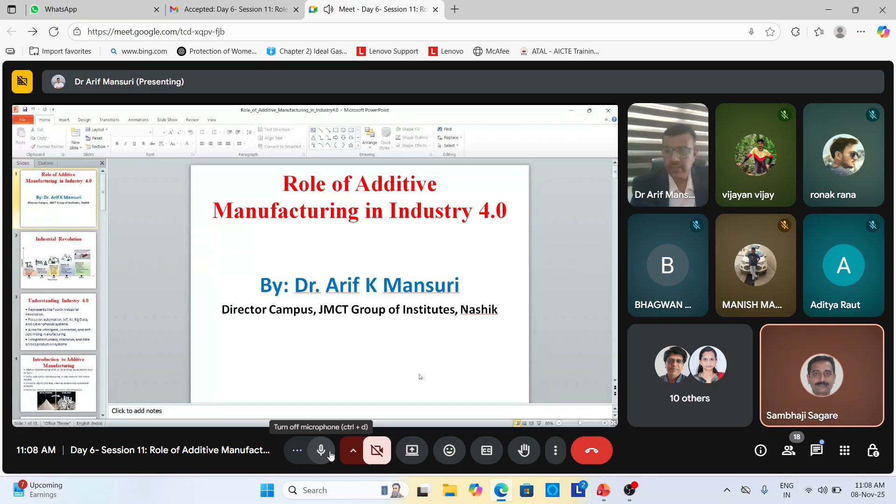Give me a second. Is it visible? Yes, sir. Yes. Thank you. It's visible, sir. I think now it is on the screen.

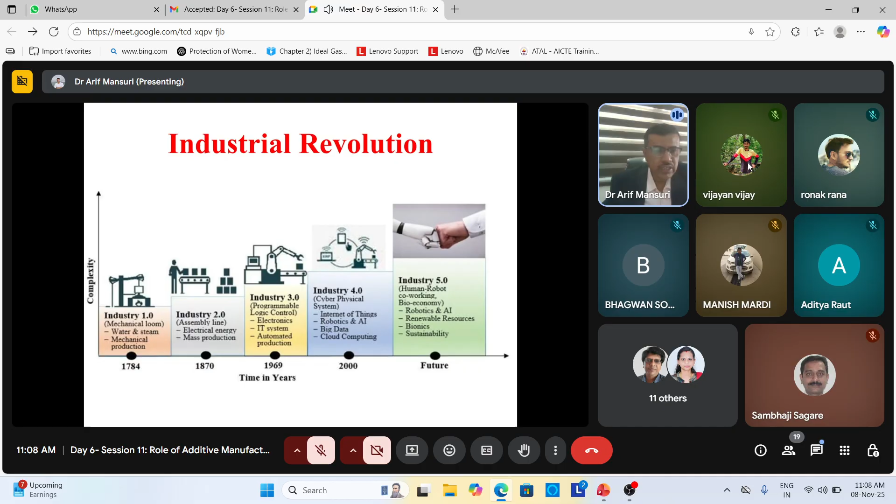Okay. So we will start with the industrial revolution. All the dignitaries present here are from industry or from academia. We all know the industrial revolution was there, and it starts from 1784. These are the four revolutions, actually five revolutions. We are on the verge of transformation from 4.0 to 5.0. Actually, before going into the future, we should know the past. So we'll brief shortly what happened in the past.

In the past period, the major technological and socio-economic change started in Great Britain actually. When the industry was not in picture, labors were there and everything was made by labor by hand, and slowly it comes to the machines. When it comes to machines, it was the first revolution, that is the industrial revolution called 1.0. Mechanical machines were introduced due to the invention of iron and everything. So from hand labor, it shifted to the machine, and individual machines were used where we can make the product, and for day-to-day use, for weapons or defense, everything was made in machine.

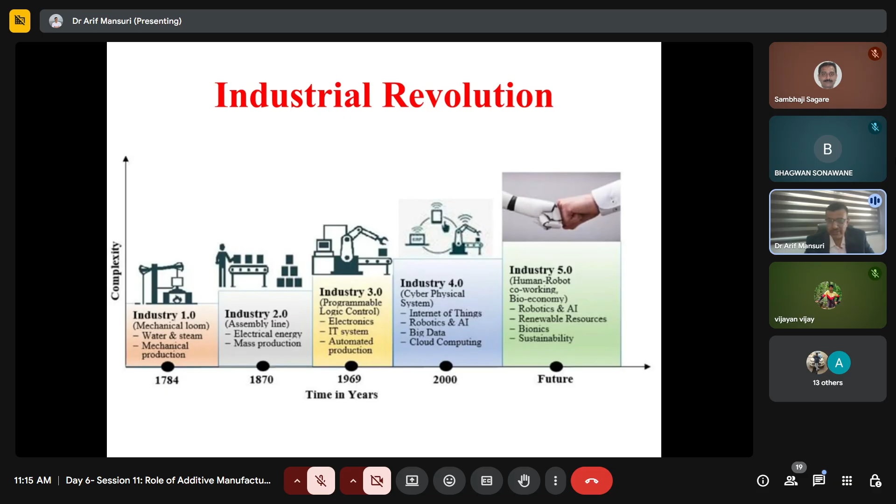So we are on the verge of Industry 5.0, where humanoid robots will be used, where from the raw material to the finished good, there will be no hand touch. The robots will load everything. The robots will be used for all the machining operations, and artificial intelligence will be there. Renewable resources will be there. Bionics will be there, and sustainability will play a great role in Industry 5.0.

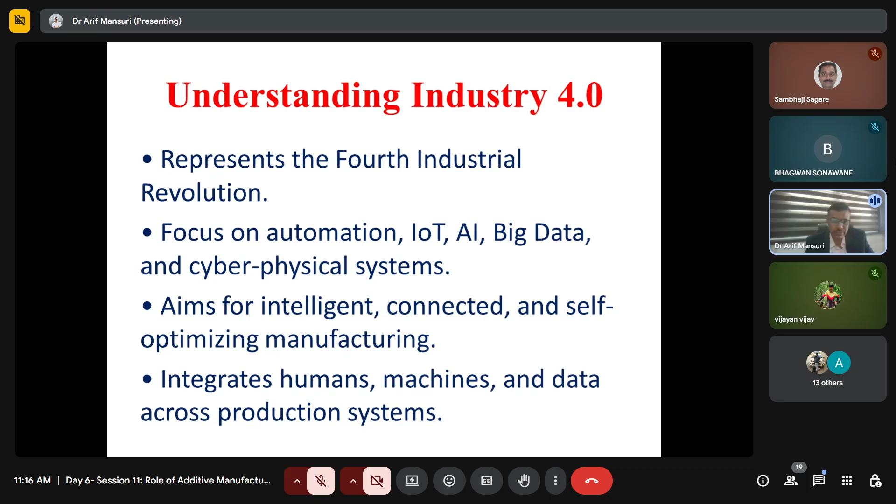So we have already talked about Industry 4.0. What is it? We are living in 4.0 actually. It represents the fourth industrial revolution, with a focus on automation, IoT, meaning Internet of Things, AI, artificial intelligence, big data, and cyber-physical systems. Industry 4.0 aims for intelligent, connected, and self-optimizing manufacturing. It also integrates humans, machines, and data across the production systems.

Now, before moving to the role of additive manufacturing in Industry 4.0, we should know what additive manufacturing is. We already discussed addition and subtraction. The traditional method, still used now, is subtractive manufacturing. But what is additive manufacturing? Additive manufacturing is nothing but 3D printing, building objects layer by layer. Unlike subtractive manufacturing, it adds material only where needed. In subtractive manufacturing, we remove the extra material from the raw material, from the workpiece. Here, opposite to subtractive, we add layer by layer wherever required.

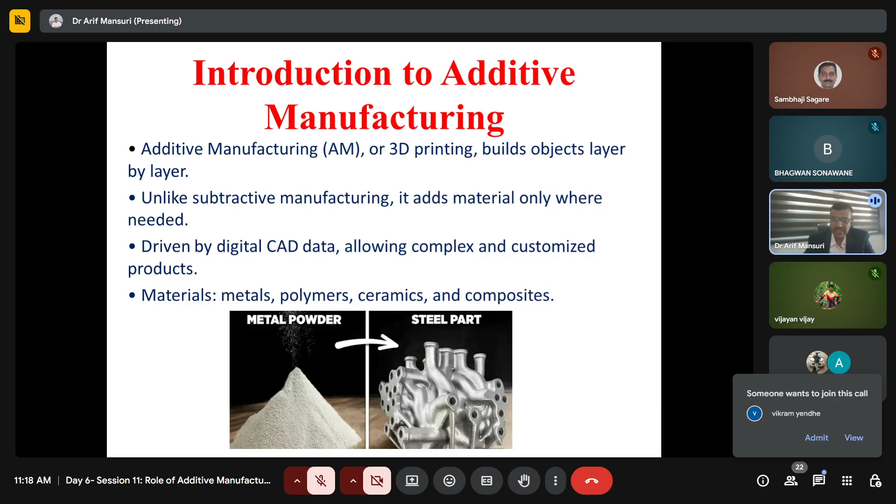Further, we'll move towards the role of additive manufacturing in Industry 4.0, and how it plays a crucial role. It actually bridges digital design, which I have already explained: the digital design should be made before proceeding to manufacture any product. This digital design can be made with the help of software, and intelligent production can be started. Digital design and intelligent production will be bridged with a smart system. How, we will see in the next slides.

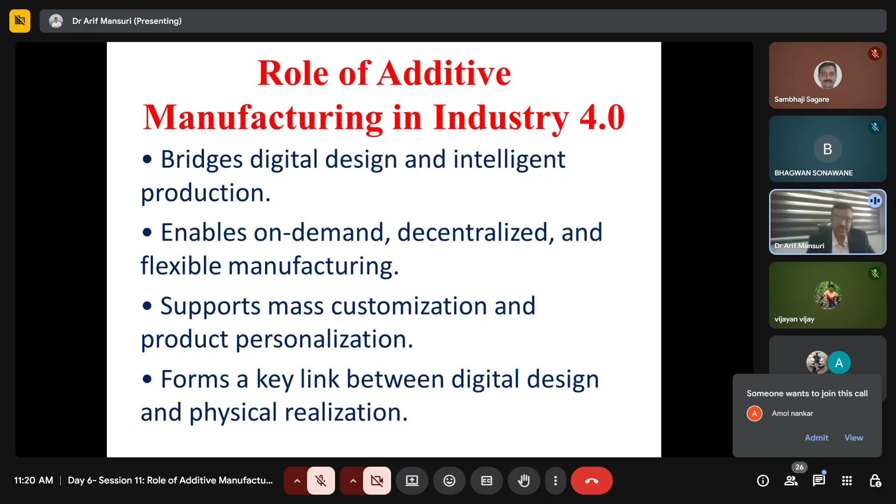It enables on-demand, decentralized, and flexible manufacturing. We are well aware of FMS, flexible manufacturing, but it can be truly justified by additive manufacturing. Flexible manufacturing means we can change the product; we can use the existing system to manufacture different products, different designs, different finished goods, or use different materials. Additive manufacturing also supports mass customization and product personalization, and forms a key link between digital design and physical realization. So the role of additive manufacturing is crucial, because Industry 4.0 says smart systems should be used, but smart systems can be used only when we use a smart manufacturing process, that is, additive manufacturing.

Next, integration with other Industry 4.0 technologies. Additive manufacturing is one very crucial area of Industry 4.0, and it is connected with IoT, AI/ML, big data, cloud computing, and digital twins. So what will IoT do here? IoT supports the sensors. The sensors track temperature, quality, and process parameters, so everything necessary for manufacturing can be tracked with the help of sensors through IoT. The second tool of Industry 4.0 is AI/ML, artificial intelligence and machine learning. AI/ML plays an important role to detect defects, predict failures, and optimize all the machining parameters.

Next, big data plays a crucial role in analyzing the process data for continuous improvement. Whatever data is available, with the help of this tool we can analyze the process and improve the system continuously. Cloud computing plays an important role to store and share 3D models globally. That means you can create a model which can be stored in your PC or your pen drive or whatever memory gadget, or you can send it to the cloud, which you are well aware of now.

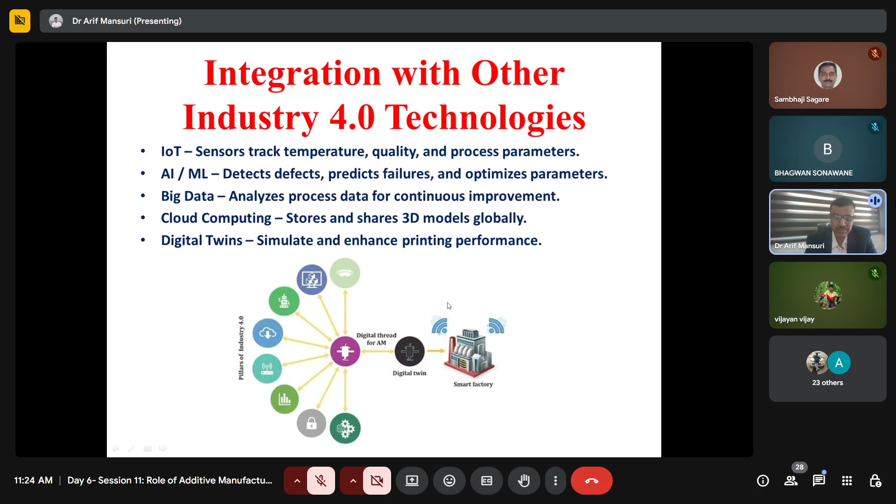Next, digital integration: how the digital integration will be happening. Additive manufacturing relies on 3D digital models integrated into the digital manufacturing ecosystem, facilitates digital twins for simulation and optimization, and connects design, production, and supply chain data seamlessly.

When we are talking about additive manufacturing, it is not limited to the manufacturing itself only, but the other processes of the smart industry, which may include your design department, your supply chain department, or the research and development (R&D) department.

So it facilitates digital twins for simulations before manufacturing. It also facilitates optimization before manufacturing, such that they can efficiently connect the design, the production, and the supply chain data seamlessly without any hassle.

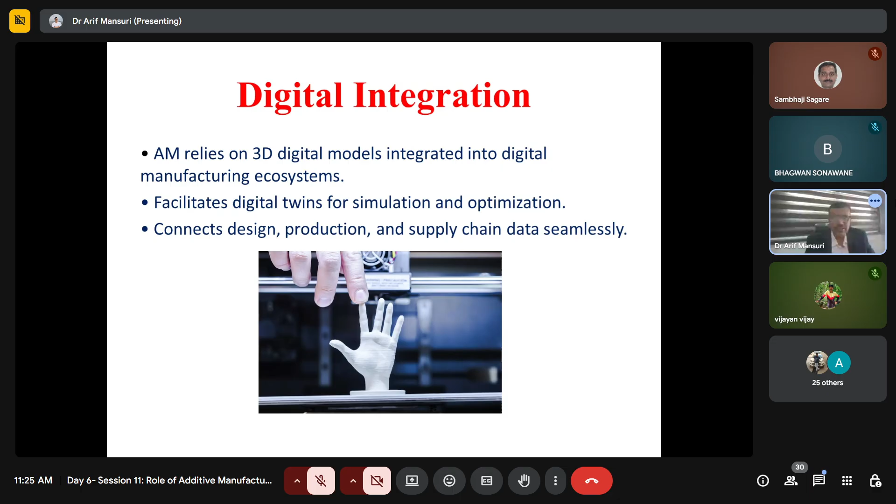So, when we are talking about additive manufacturing, we must think about the sustainability aspect. The sustainability aspect in AM is that it uses only the required amount of material, minimizing the waste.

Here, whatever we have already discussed about subtractive manufacturing and additive manufacturing, you can see in the picture. In A, the material is there, subtractive manufacturing is there, the 3D object will be made and the waste, you can see. Then in B, the material is there, additive manufacturing adds layer by layer, and a very small amount of waste will be there.

It supports the recycling and remanufacturing of the material, and reduces transportation and energy use through local production. So when you are reducing the transportation, you are reducing the handling, the energy required for transportation and the re-handling of the workpieces, raw materials and finished goods, which add to the carbon footprint.

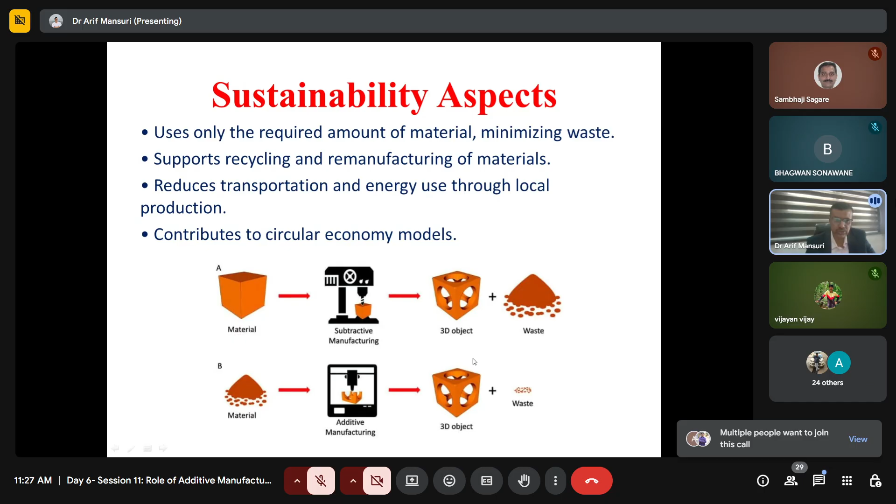So these are the advantages of additive manufacturing. Complex designs are possible without extra cost. Complex design means you can manufacture any type of product with the help of this. There is no limitation now. Before, for traditional or subtractive manufacturing, there were limitations: which machines can be used, which material can be used, how the tooling will be, which tool has to be used. Now it is not like that.

Rapid prototyping accelerates innovation. Rapid prototyping will boost your innovation. You can invent new products, new shapes, new sizes, everything. Material efficiency and sustainability will be there, as we have seen in the previous slide.

Reduced need for inventory: print parts on demand. Whatever demand or order you receive, if it is not fixed by the industry, and if you are a vendor using AM in your industry, you need not worry about demand changes from the customer in whatever work you are doing.

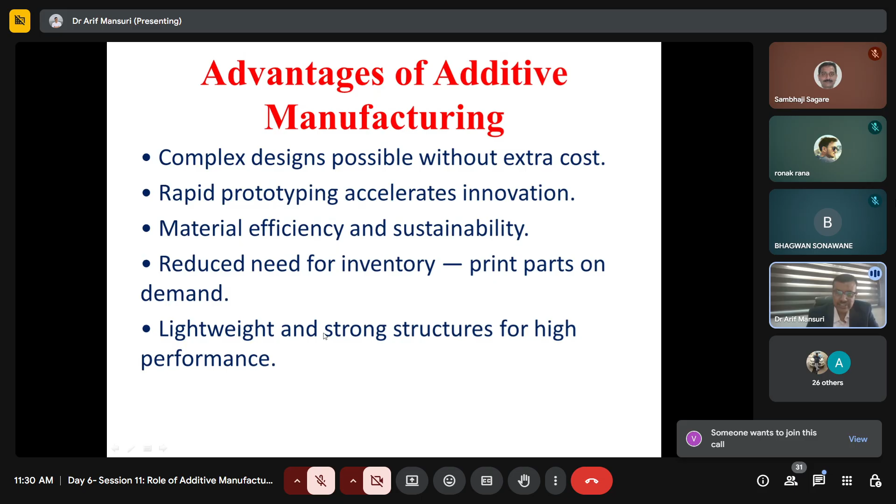Suppose Tata or Mahindra or any automobile industry is launching a new car, a new design will be there, and you have been doing your job with these industries for many years. Now you don't have to fear how the new design will be produced in your industry. You can change anytime, and don't worry about the inventory you have to maintain, because it allows you to reduce your inventory to a minimum level. Lightweight and strong structures for high performance can be made by additive manufacturing.

Next, what types of industrial applications nowadays can be made with the help of AM? Aerospace is the most popular one: lightweight components, fuel-efficient structures, everything. Different types and shapes of nozzles used in aerospace can be made with AM. Automotive: prototypes and custom limited edition parts can be manufactured with the help of AM.

Actually, in the car, the dashboard and other products used in the interiors of the car are mostly manufactured with the help of AM nowadays. Healthcare: again, it plays a vital role to manufacture implants, prosthetics, surgical models, everything.

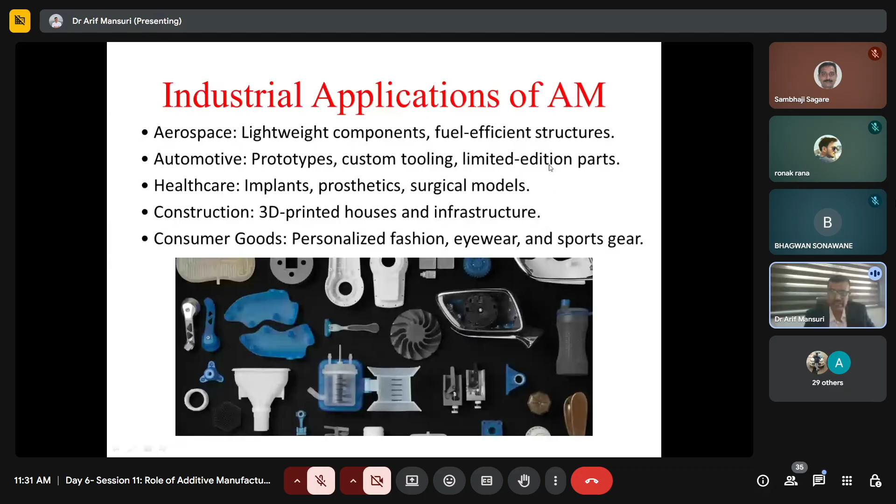Construction: 3D printed houses and infrastructure have already been manufactured in European countries with the help of AM. If you search in Google, you can find videos of these houses and infrastructures in Europe. Consumer goods: personalized fashion, eyewear, and sports gear can be manufactured with the help of AM. These are the industrial applications of AM.

Now, if we move further, what are the types of AM process? So there are seven types of AM process. For MTech, those who are completing their MTech in advanced production systems, or specialization in manufacturing or production systems, have to study this particular thing, that is AM, additive manufacturing. They have to look in depth. So material jetting they have to learn.

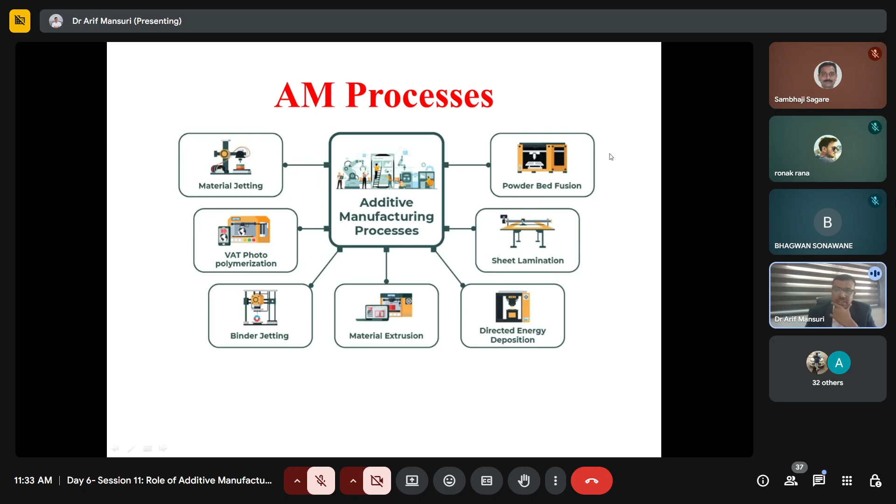We don't have that much time to go in depth of each and every type of AM, but you should know there are seven types of additive manufacturing process that can be chosen and utilized for particular cases. Vat photopolymerization will be there, binder jetting will be there, material extrusion will be there, directed energy deposition will be there, sheet lamination, where one by one sheets will be laminated or stuck together. Powder bed fusion. This powder bed fusion is the most popular AM process.

So what are the challenges and limitations? High equipment and material cost. Of course, if a smart system has to be used, you have to spend some more money, but it will be a one-time investment, and that can justify the flexibility for different products from different orders. Slower for mass production compared to traditional methods. Quality control and repeatability issues may arise. That research is still going on. Limited material availability, because not every material can be 3D printed.

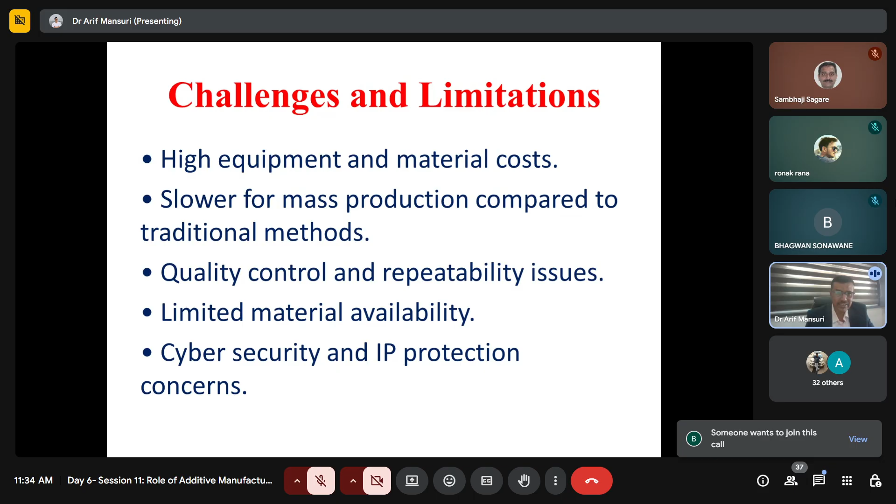Cybersecurity and IP protection concerns. Of course, we have discussed, if you have the 3D model and you want to sell it to any other country, they should not use it illegally. So cybersecurity is necessary, because again you are going with cloud computing and everything. So of course IP protection and these things will matter.

Future of AM. Actually, AI-driven autonomous 3D printing will be there, and development of smart and multi-material printing will be there. Nowadays, only a single material is used to produce a single product. It may go to multi-material. Hybrid manufacturing combining AM with CNC machining, 4D printing. 3D printing we have learned, we have seen, we know everything about 3D printing. But a fourth dimension can be added in future.

Maybe you young and dynamic people can work on this, and you can select this area of research for your PhDs or your next qualifications. 4D printing is again a challenging area. Structures that change over time. Global networks for distributed digital manufacturing. These are the future trends.

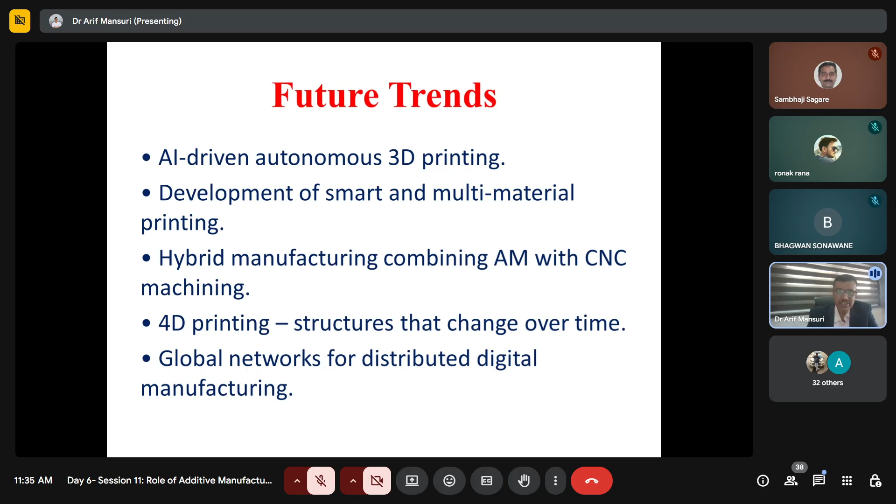Now we'll come to the conclusion, because additive manufacturing is a vast topic, a manufacturing process which has to be studied in depth, and 2, 3, 4, 5 hours will not be enough for this particular topic. But my intention in delivering this topic was to create awareness among young researchers, academic coordinators and teachers that this is an area where you can also focus.

Our time is still going on, but when we were in our 30s and 40s, we were very enthusiastic about Industry 3.0, mass production and everything, CNCs, DNCs, programming, PLCs. At that time we studied that. Now it is your turn to go beyond that, and the possibilities in AM should be explored by you people.

Additive manufacturing is a key pillar, as we already discussed. It promotes smart, flexible, and sustainable manufacturing, and bridges the digital-physical divide in production. Before computers and all these cyber technologies, only physical industry was there. Future factories will rely heavily on AM for innovation and efficiency. It is the truth. You have to accept it. We all should accept that mechanical engineers should grow and progress with the IT sector also.

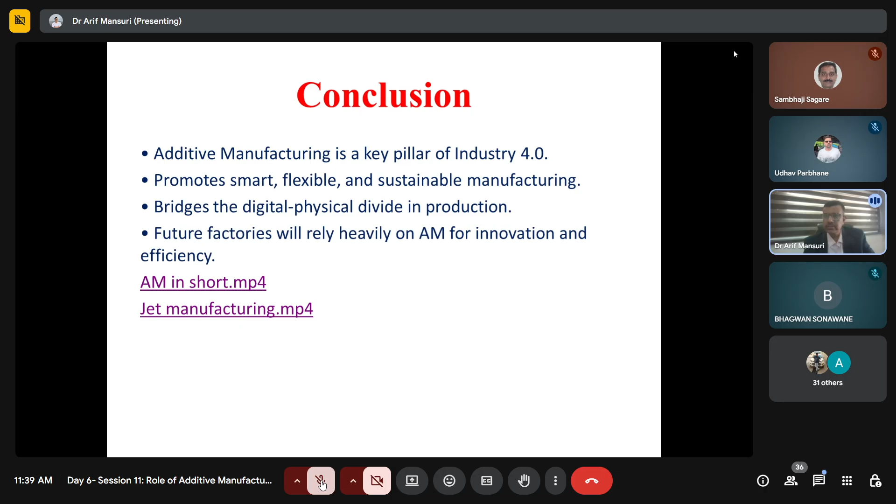But you can hear the sound? Yes, sir, the voice is audible to us. Is it visible now? No, sir. The PPT is visible. The video is not visible to us. Okay.

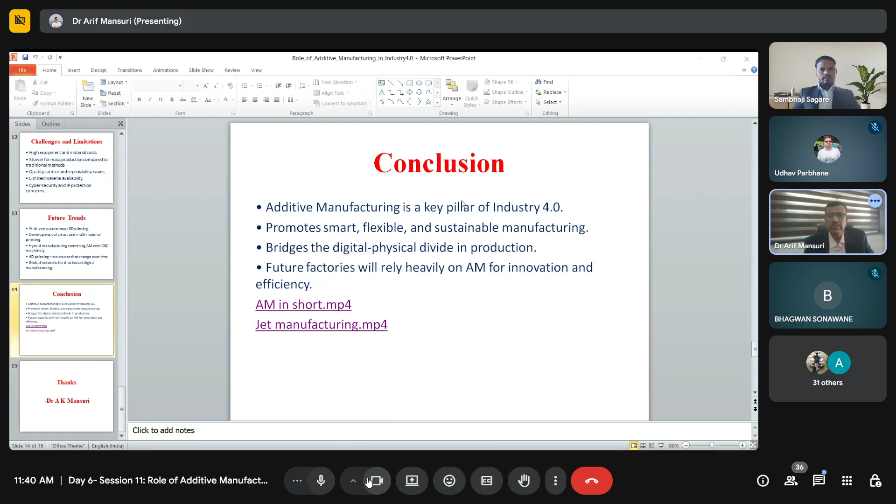Yes, sir. Visible, sir. Please say it. Yes, sir. Visible.

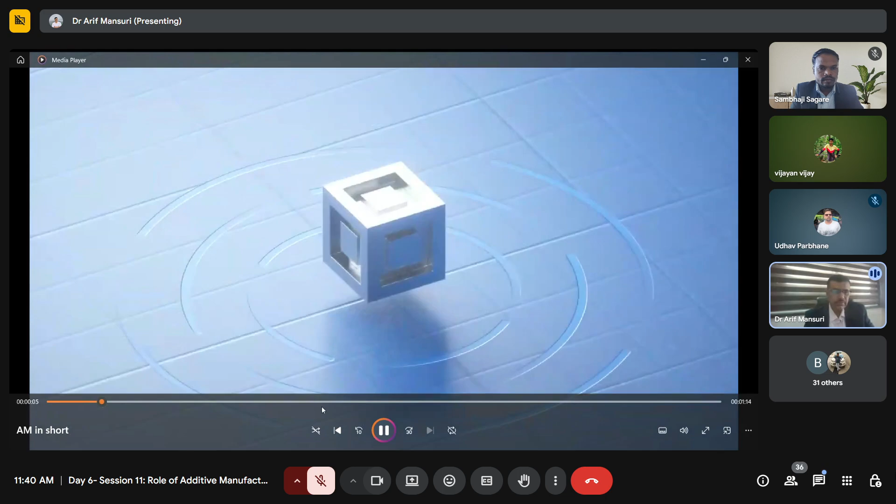Additive manufacturing, also known as 3D printing, is a process that creates a physical object from a digital design. An engineer designs the object using computer-aided design or CAD software. The 3D design file is then sliced into thin layers and uploaded to an additive manufacturing machine.

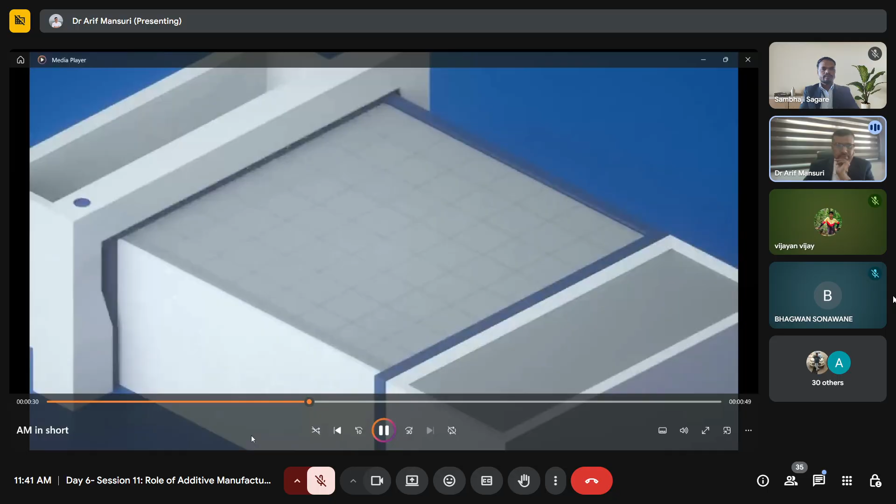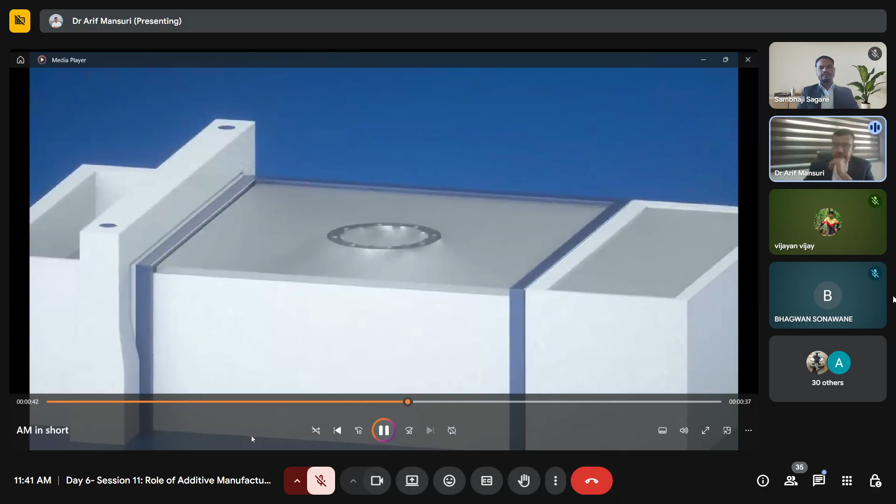The manufacturing process begins once an extremely thin layer of metal powder is spread across the platform. A heat source, such as laser or electron beam, then melts the first layer of the 3D design. The platform is lowered, and another layer of metal powder is spread across the platform. The layering and melting process is then repeated until the part is complete. The metallic powder is removed, and a physical object is revealed.

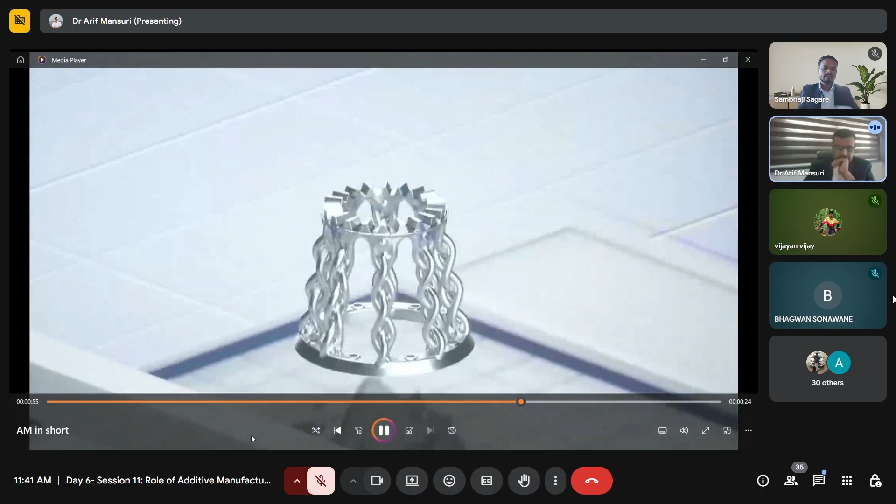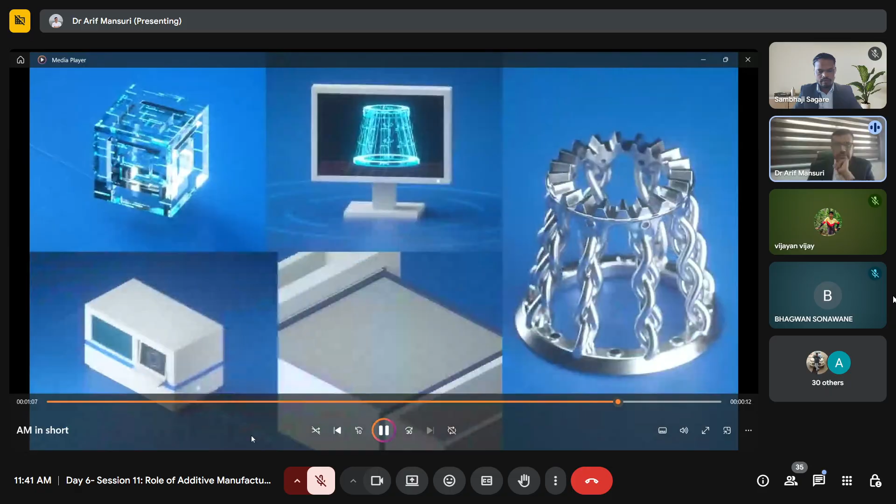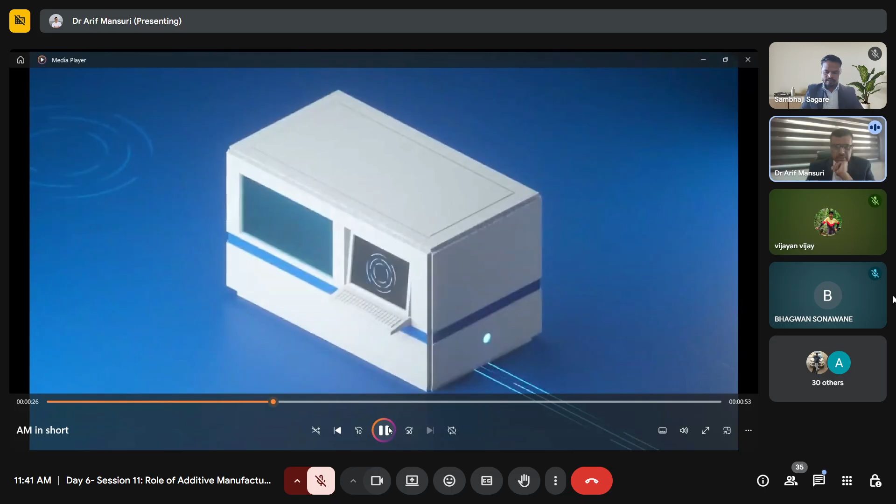Here, whatever the data is fed to this particular machine is the files which are called STL files, stereolithography files. When you go in depth into the manufacturing processes and their types, stereolithography will be the word you use again and again for designing or modeling.

Once the model is ready, we have to cut that particular model into slices. One slice may be in microns. Suppose 50 microns or 100 microns or 200 microns will be the thickness of that particular slice, and this will be saved as an STL file and sequentially fed to the machine through the computer.

One layer of metal powder is spread across the platform. A heat source, such as laser or electron beam, then melts the first layer of the 3D design. This first layer will be completed after the STL file is finished. Then the second STL file will be fed, and it will go on.

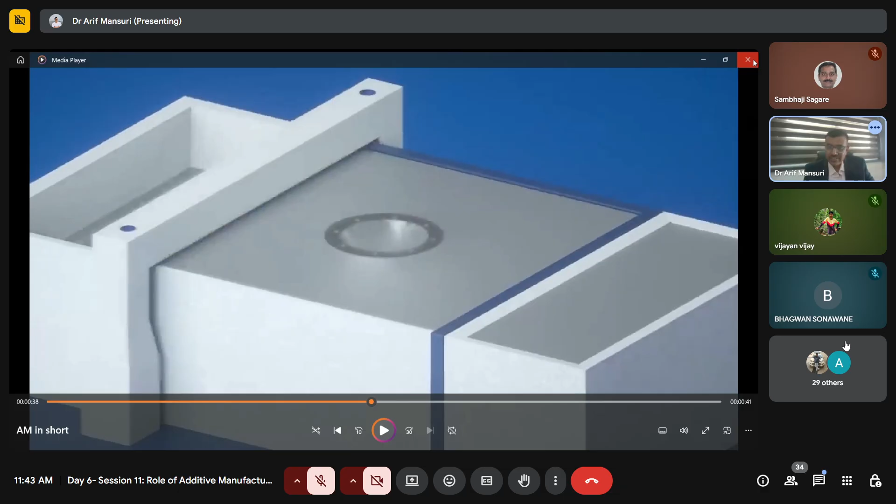Can you understand now? Can you understand now? Am I audible to all? Yes, sir, you are audible. So we'll go for the next video.